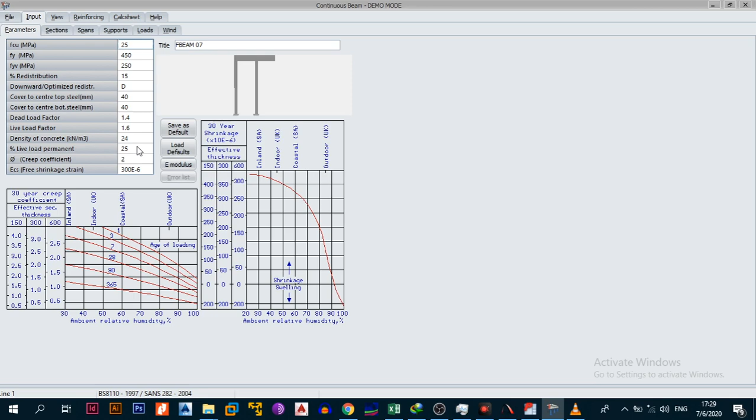So what we're doing today is F beam 7, designed using grade 25 concrete, 450 MPa for the steel, 250 for the links. Percentage redistribution is 15, is downward, is not optimized. The cover to the center of the steel is 40/40. Obviously we're using BS, so it's 1.4 and 1.6, and the density of the concrete is 24, and the live load permanent is 25. Creep factor is 2. Okay, this is just the basics.

So the sections of this beam is going to be a 220 by 500 beam. That's the section. And for the spans, it's going to have two spans, 1.88 and 1.66. For the supports, it's going to have two columns, which are 220 by 220. And then one part is going to be cantilevered, which is the C part, also 220 by 220. You just put it out there.

And in terms of the loads, it's going to have some walls on top of it, so that's why you see there's wall loads, and then there's going to be slab loads. Also please note, this is in demo mode, this is Prokon in demo. So everything I'm using right now is in demo. I'm just trying to show you, you can get the same quality even if you're using demo.

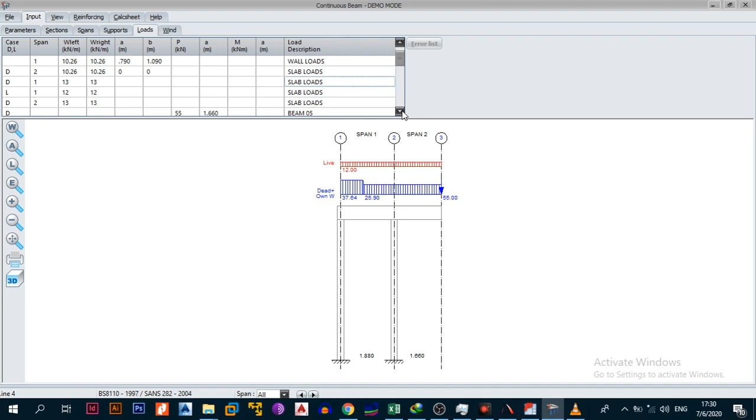So after you enter everything, the next thing you want to do is go to view, and this is where you can see the deflections and also everything else, the moment, the shear, and the steel that you need. As you can see, the elastic deflections, even though it's loaded with another beam at the end, let me show you - if you go to input and loads, scroll down, it has another beam resting on top of it, Beam 5 putting 55 kilonewtons at the end. But if you go to view moments and shear, you'll see, even with that, the deflection is 12.7 max.

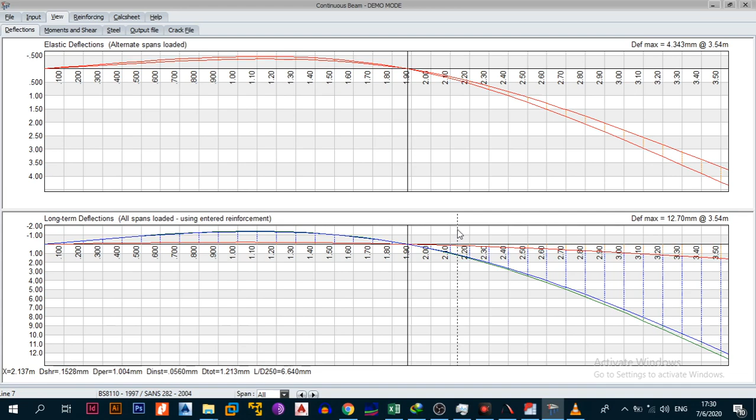Okay, after you load everything with reinforcement, the limit we usually want to play with is 20. 25 is okay. At 35 you start having finishing cracks, so you don't want to do that. 50 is just pushing it beyond anything you want. So if we check the maximum moment and maximum shear, we see that since one part is cantilevered, over the support that is cantilevered is where you're going to be having your maximum moment - in this case, 204.2. And that's where the maximum shear is going to be as well. So you just add this one at this part and this one at the other part.

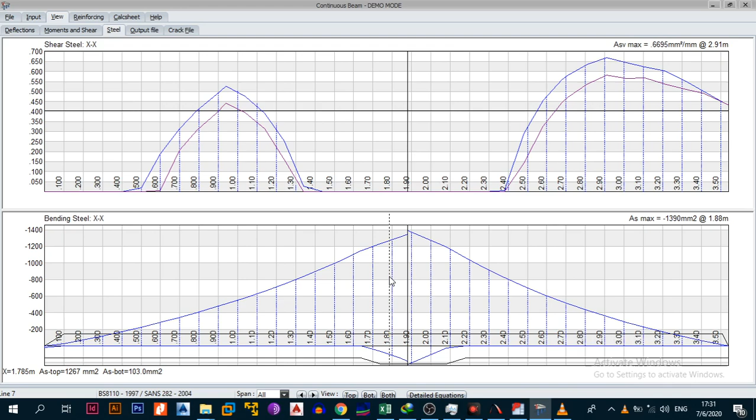So for the steel, this gives you the steel that you require given the shear and the moment that is going to be there. The top one is for your links, then the bottom one is for your longitudinal bars. So we don't worry about the output file or the crack file, we go to reinforcement. In our case, this is what happens - it gives you what type. Is it a normal beam? Is it a slab? Is it 3? Is it 4? Is it 5?

Okay, and in our case we're choosing 1 because it's a normal beam. The maximum bar length, let's just go with 6. The minimum diameter, 12 is okay, 20 is okay, 20 is okay.

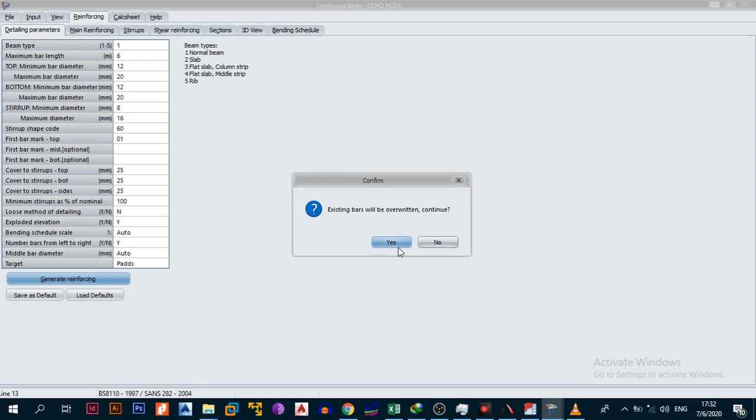I already did this, but I'm just going to show you through so we can actually regenerate. So I'm going to put 60 there, and everything else is okay. So generate reinforcement, existing bars will be overwritten. Yes, continue. Okay, so normally this is what's going to be set up.

This is going to be the setup that you're going to have, right? And in our case, as you can see, it's telling you you need 3 Y20s there, 2 16s over there. But then this is what I like to do. I like to play around with it, just see if I can move the bars a bit, because this is what is going to go.

So this is a normal thing that I usually do once is there, because I'm trying to set up the bending schedule way before I even go and start detailing. Because what we're going to do is we are detailing this beam. I've already designed it, but now I just want to fine-tune the steel and put the bars where I need them.

All right, so in this case I think 5Y20 is just too crowded for me. So what I'm gonna do is, let me try and put some 25s, put them to 2. Right, so that doesn't change too much. So what I'm gonna do again is I'm gonna put this at 32.

All right, so that is too much. And then what I'm gonna do is grab this bar, then delete that bar. All right, so in this case that point is going to be loaded immensely. As you can see, 2Y32s do not even cut it.

So what we're gonna do is we want to add a top bar. In our case, let's just make number of bars 1. So we're just gonna make a 16, and then we're gonna drag it to that point. And let's see, does a 16 change anything? Actually, it does not change anything.

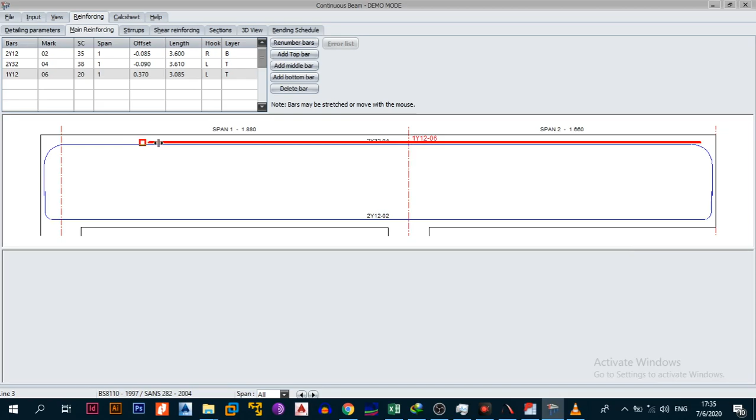Then we obviously have the 1 16, but what we're gonna do is, let me see if we can put a 12. Let's put a 12. So if you put a 12, because a 12 bar is pretty small, so you definitely don't want that. So yeah, those 32s will work. So we're gonna have two 32s and one 12 at the top.

Okay, that looks good, because everything in blue is now under the red. So 32 is definitely killing it, bro. As you can see, it's killing it. You could have put the 32 only. Let's see, that's the other thing.

You can play around, that's the beauty of this, trying to play around with this. Because to be honest, putting 32s all the way to that other side, I'm not really liking that. So I'm deciding, well, this is what we can do.

This is the basic process that you go through. You'll be just looking at, alright, does this work? Does this not work? If it doesn't work, then definitely means we need to do something else, right? It's as easy as that.

So what you can do, right, in this case 32s need a level for about a meter or so. So 16s are not working in that point to that point.

Let's see, we might have to put 16s, because let's take the 32, let's move it back to that point. Let's make it shape code 24 now.

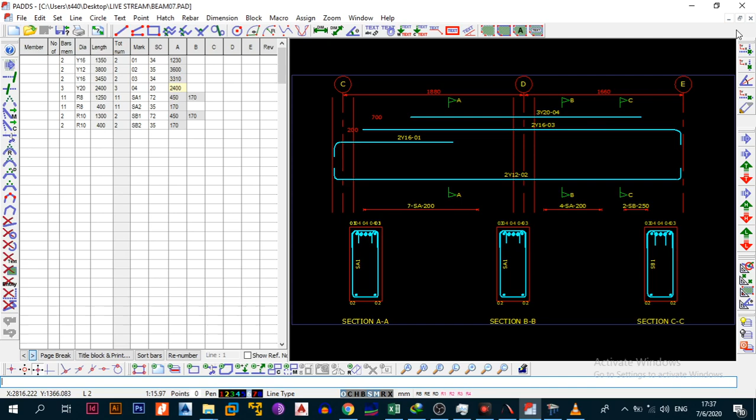Now we've taken care of the top, still what we're gonna do is we need to now look at, let me just close this. Initially I already had the bending schedule generated for me, but I'm just gonna close it, and we're gonna generate it again starting fresh.

Usually what I want to do is I want 2 bars to lap off at the top, so instead of having shape code 38, I have shape code 37. But in this case we cannot use shape code 37 because that would mean we need 4 Y32s in the beam, which is just too much.

We don't have room for pouring the concrete, it's too much. So what we're gonna do is, now we have the top bars, we're taking off, we know we're gonna use 32s and there's no going past 32. So yeah, it is what it is.

Next, what we're gonna do is we need to take care of the bottom bars, and for the bottom it's telling me 12s are okay, because if you check at the bottom we don't even have any moment there that is supporting 12s. So this is what we're gonna do.

In this case we're not gonna use shape code. By default it gives you 35, which is the equivalent of 38, right? It's the same bar, as you can see. Let me just change it so that you see, even if you change to 38 you still have the same bar, as you can see if you check it.

Let me change it again to 35 so you can definitely see I'm not lying to you. There you have 35. So there you go, you have 38, right?

So this is what I actually need to print for the client. What I'm doing right now is what I'm gonna do in real life. This is the thought process that goes when I'm not making a tutorial. I think a lot, whilst in the tutorials you already see what I've already thought about.

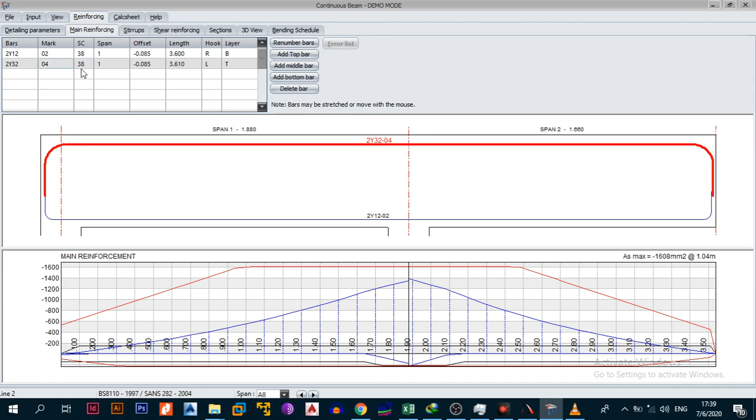So in this case, for the bottom bars, what we're gonna do, I'm thinking of doing shape code 37, right? And let's push this bar. We're gonna use 2 bars, push 2 Y12s over there.

Then we just need to add a bottom bar, right? So the bottom bar we're gonna use 2 Y12s as well. These are going to be laces.

So what this is going to do is that they're going to be over the support point, so they're just going to lace. They're going to lap with these ones, then lap with the other ones as well.

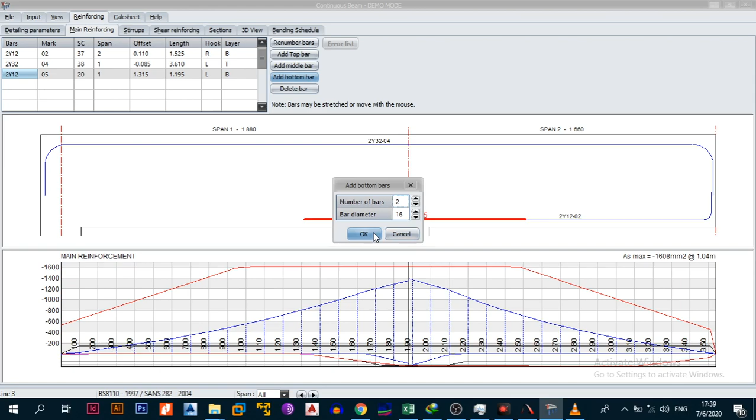So we're also going to add another bottom bar, 2 wide. I'm just thinking of bumping it up, but nah, let's use 12s. We don't want to over design it way too much.

But then the moment there seems to be a little bit too much, because I'm checking it out and now I am clear of that. As you can see, the blue line is clear. So yep, we've taken care of that. So what we're gonna do is, this side is telling me if I put 12s I'm okay, right?

Yeah, if I put 12s I'm okay, because that's the whole gist of it. You just want to put in steel that's, yep, there we go. Serotonin from the sun is still playing in case we need to switch it up or increase the volume. There we go, so that you guys can also hear what I am hearing as well.

So this is it. Now we got 2 Y12s bar mark 6 and 2 Y16s there, 2 Y12s there, and as you can see, this is perfect. Everything in blue is covered by everything in red. This means our beam is not going to fail. All right, so I think this is good for me.

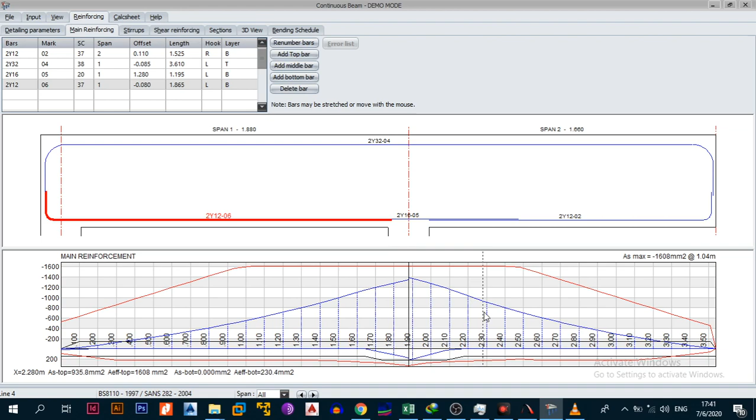So then I go back to detailing parameters. Then I'm going to remove the 1 from first bar mark top and put it at first bar mark bottom. Right, so then I go back to main reinforcement. Then I say renumber bars. So what this does, it starts renaming the bars from the bottom, so that now I know I have bar mark 1, bar mark 2, and bar mark 3.

Then I go back. So bar mark at the top needs to start from 4. So I go back to the top. Then I put 4. All right, and I go back to main reinforcement, then renumber the bars. There we go, it's good.

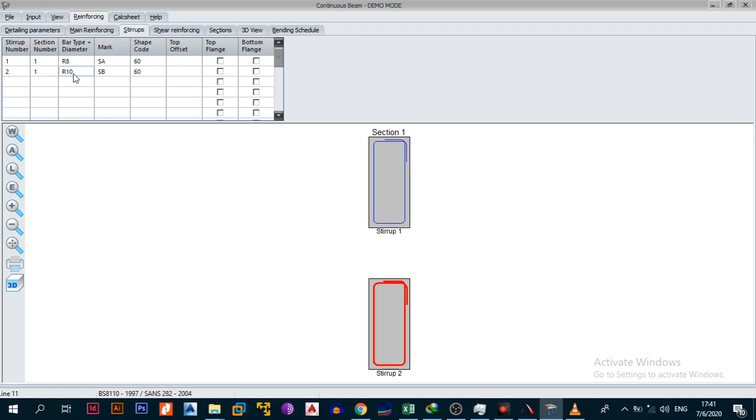Next I need to go to the stirrups. So initially it proposed 2 types of stirrups, R8s and R10s, SA and SB. Let me see why it's saying that. The reason why it wanted to put this in different positions, but now let me show you what I'm going to do. I'm going to go back to stirrups and I'm just going to delete the second line. Then this one I'm just going to make them Y8, right? So I make them Y8 and I go back to shear reinforcement.

So what I'm going to do is I'm going to delete everything else, then start off with the first one. Then I'm going to show where I want my stirrups to begin and where I want them to end. And as you can see, the shear is now taken care of and it's now below. Okay, I just wanted you to have a feel of the track, but now I think it's good.

Let's hear my voice. Oh, we could change. No, let's change. This is the reason. It's a live stream. It doesn't have to conform to certain, what do you call this, certain standards. So we just, hopefully you can. Okay, now that feels good. Right. Okay, cool. Let's go back.

So as I was saying, I was talking about the stirrups. So as you can see, now I have 9 SA, and remember, the stirrup SA is a Y8, shape code 60, and I've put it at 200 spacing. So we're gonna have 9 stirrups for the first span, and as you can see, that takes care of all the shear that we had initially, and we're good to go with that.

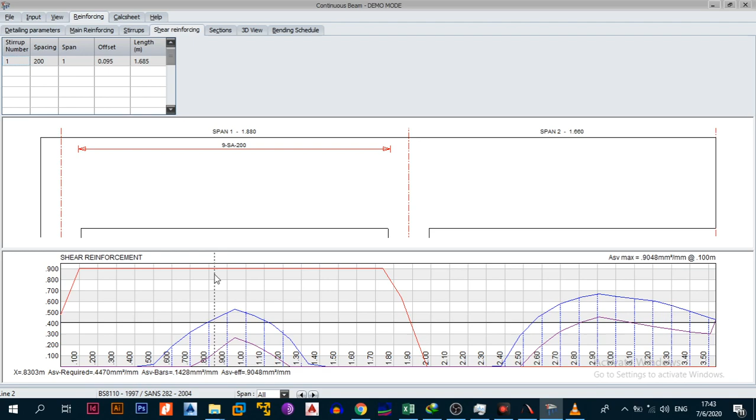And also, no, wait, we're gonna have to put 200 again. This time we want to go to span 2, and for the offset I'm just gonna say 1. So you see what happens. This is what it does. For the length I'm just gonna put 1. Now you can see the arrow pops up, and you can move this all the way to where you have the other beam coming in, because this is where it will definitely need to take care of that shear that's coming in.

So just to make sure that you also provide what we call hanger stirrups, I'm just gonna push 4 at 200 there, then I'm gonna add this one, then I'm gonna put it at 150. It's gonna be on span 2, then the offset is gonna be 0.5, then the length is going to be 0.25. This is just so that I can see the arrow. So this is what we're gonna do.

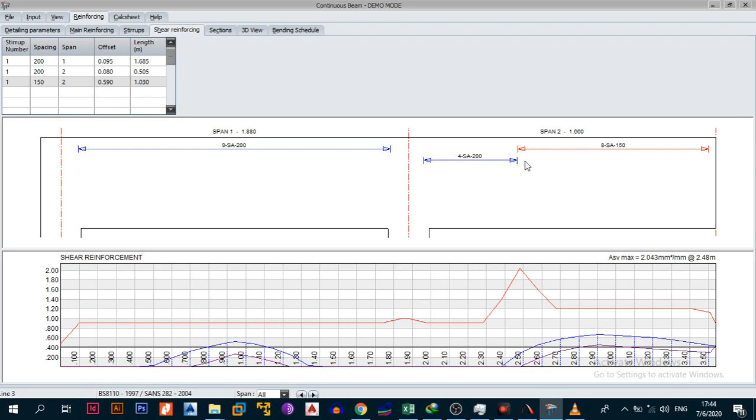So these are going to be extra stirrups that I'm putting there to adequately take care of the load that is going to come in from the extra beam, that is beam 5. So now we've done this. The next thing that you want to do is go to my sections.

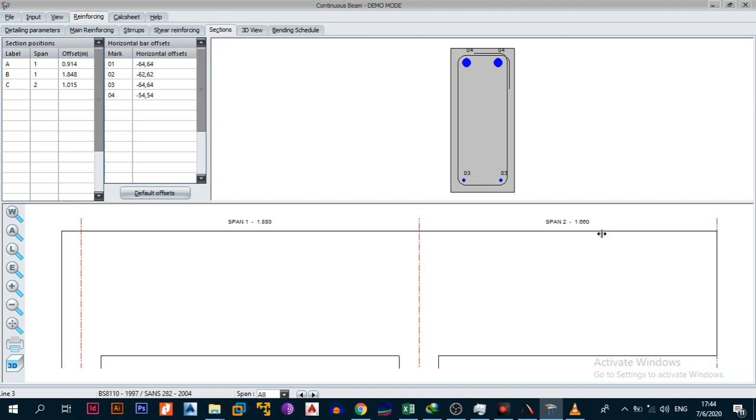How many sections do I want to show? In this case, I think I'll show section A. Section A is good. Then we want a section through the support, because you've got to know what's happening through the support. Then we're also going to have section C, which is going to be the last section. Okay, all right, so it's still playing, and now we're good. So these are the sections, so just wait up.

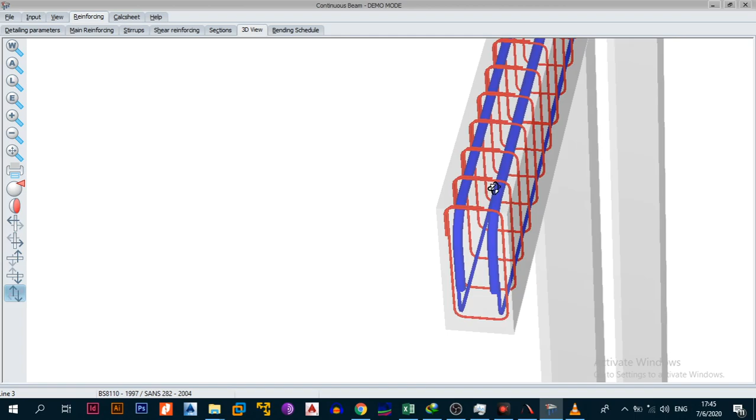Then this is going to be in 3D view. So this is going to be my beam when it comes out on site. As you can see, 32s are huge bars, man. Just look at these bars. These bars are huge. Then you're going to have the 12s at the bottom, these tiny little 12s. Then you're going to have the 16s at the center. And yeah, this is it.

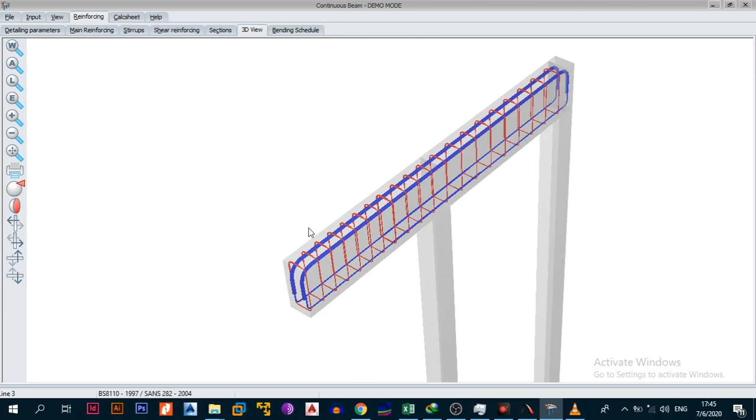So there is the beam, there it goes. So I already designed these beams way back. I'm now just trying to detail them because now they're needed. So last but not least, what you do is you go to the bending schedule, and in this case, I remember it's starting from grid 5, 6. So it's 6. All right, I'll look at it later on, but I'm just going to put 6.

So this might take too much time and it may crash, but normally after I've done this, the next thing that I do is just say generate schedule, and I wait for it. And remember, this is in demo mode, so we're going to wait for it to produce the bending schedule. So as you can see there, it has produced the bending schedule.

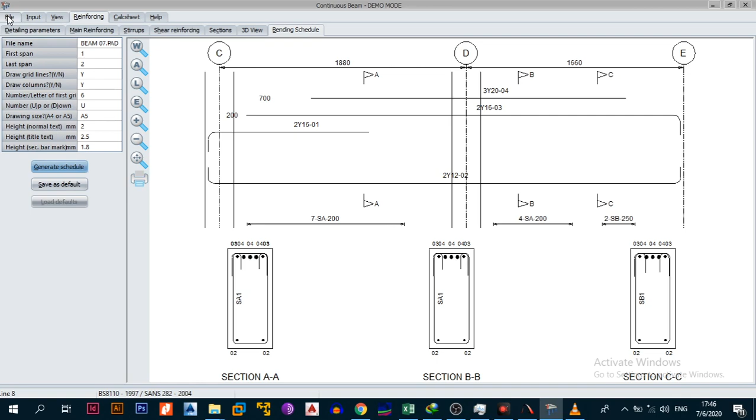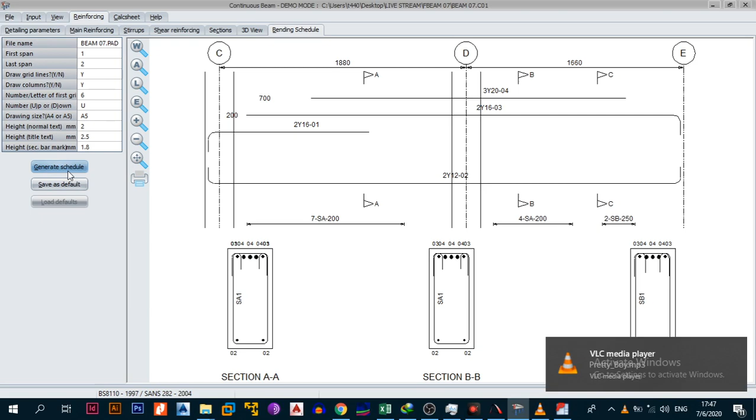So let me just go to file to see if I was in my working folder. My working folder is wrong, so I need to go to computer, then go to desktop, because I have a folder there, and set this as my working folder. Yes, save, and save it as what you want. So I'm going to go with beam7, and it's going to say it already exists. Yes, replace. Then after I'm done, we just want to regenerate that schedule.

Okay, now it's being used by another process. So what this means is I need to set a different folder. Alright, this is the boring part. No, there we go. The schedule has been generated. Now if we go to my desktop, go to live stream. Which one is the working folder again? Let's see. There, as you can see, this is Prokon 3.0.

It's trying to load the PADDS window, so we just have to wait for it. We're just going to be patient because the live stream is not a tutorial. But yeah, that is basically just the workflow that I usually go through when I'm designing beams, right? So let's see, it's 1747, so this is definitely it. So let's wait for it to start up.

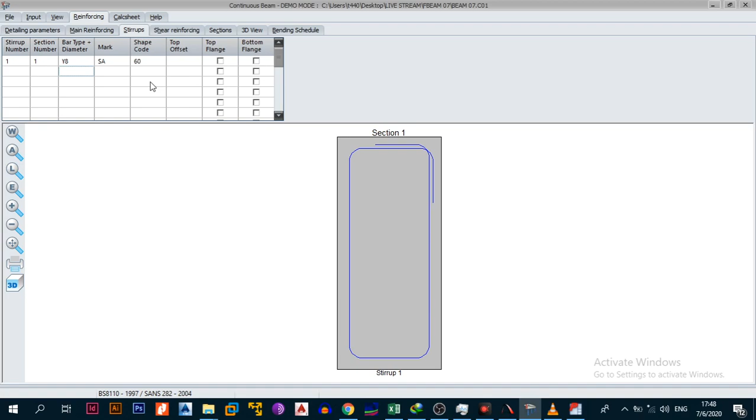There you go. So this is what happens. We were in Beam, right? We went to the detailing parameters and we set them. Then after setting the detailing parameters, we went to the main reinforcement and chose how we wanted our bars to be set up. Then next we went to the stirrups or the links and we chose Y8, bar mark, shape code 60. And then we went to the shear reinforcement.

This is where we're just showing where we want our stirrups to be at different spacings. Then we looked at the sections, where we want our sections. Then we looked at the 3D view. This just helps you visualize, but it's not important. And then we looked at the bending schedule.

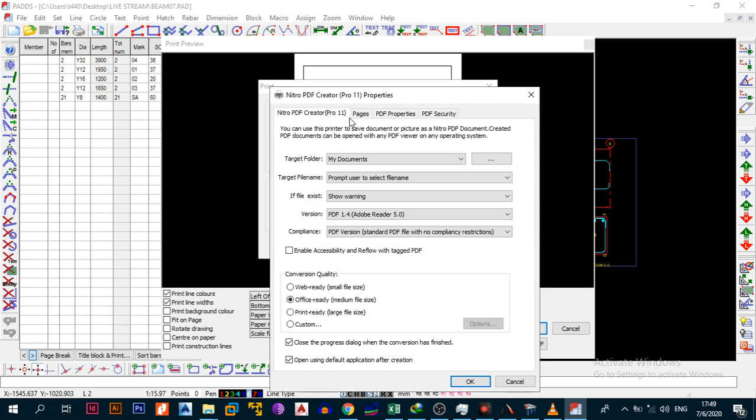So all of this I was doing so that we could have this bending schedule. But the problem is this bending schedule is not professional, man. Just look at it. To give you a glimpse, I'm just gonna go title block print, and let's just make sure the BS template, yep, it's definitely. So I'm gonna print a sketch. So I'm gonna say print properties, pages, later. Then I go to A4.

Then I say, okay, so I need to keep this video short as well, because where did it go? This software, I think it records. You see? No, that's not my. Let me see. Well, it's not taking up too much space, so I don't think it's using too much space.

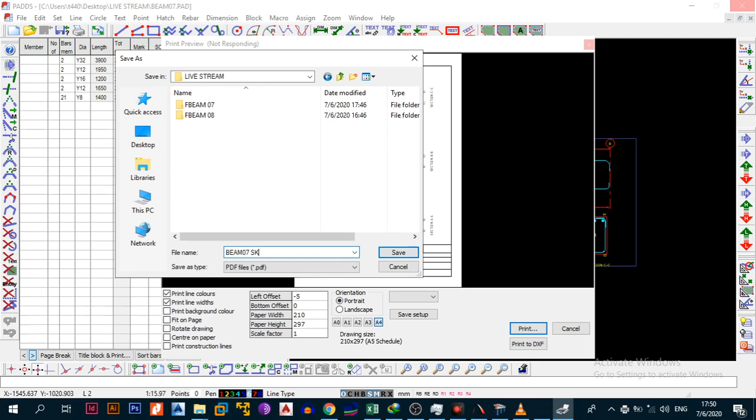So we're gonna go to desktop, go to live stream, then we're just gonna say beam 7 sketch. That's what I do. And I'm also in a compromising position on my desk because I have a different setup. So let's wait for it to pop up. As you can see, I do a lot of detailing and everything. So wow. Right, there you go. Then what I want you to do is say view and rotate. So as you can see, this is not professional, except for the title block. This doesn't look good.

So now this is where the part comes in. You've designed it, then you detailed it because you told which bars you wanted, and you also have an idea where you need them. But the beauty of using Prokon is that the bulk of putting the bars and the line work and everything else has been done for us. Now what we only need to do is to be the last man, do the final touches, do the nice little nitty-gritties.

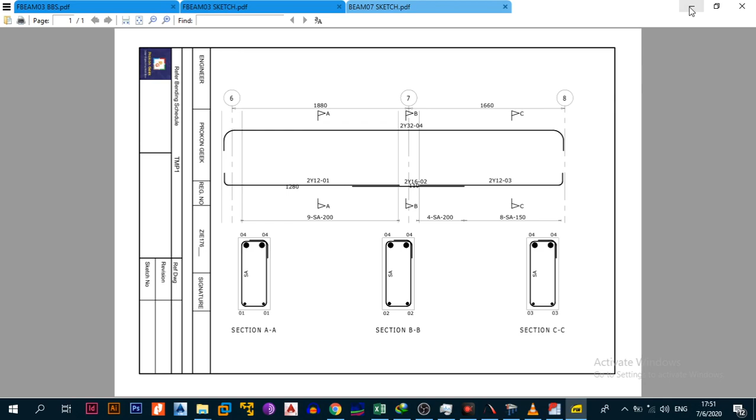Let's just make sure this one is recording. Yes, it is definitely recorded. It's been 23 minutes in and streaming. So let's go. Let's take care of that.

So the first thing that you do is you go to status bar. Then you want to change this to elevations. Right, the music is still going. I like this track. Sections. Then just say okay for now. Then what you want to do is BB, select everything.

Remember, I'm doing this in demo, man. This is in demo, so you don't have an excuse for learning Prokon, saying I don't know how to use it in demo.

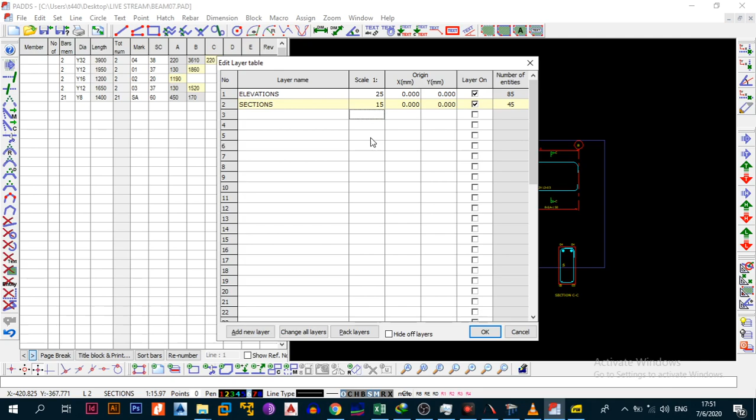Okay, and we're gonna say okay. I say no for now. Then I just want you to move this, move it down a bit. Right, then I think that's okay.

Now we gotta move because supper is cooking right now, and very soon people will be calling me, yo, where you at, Prokon Geek? You need to come and eat, so I can't defy those orders, because I'm not the one who's cooking. So if somebody's cooking for you, you have to go.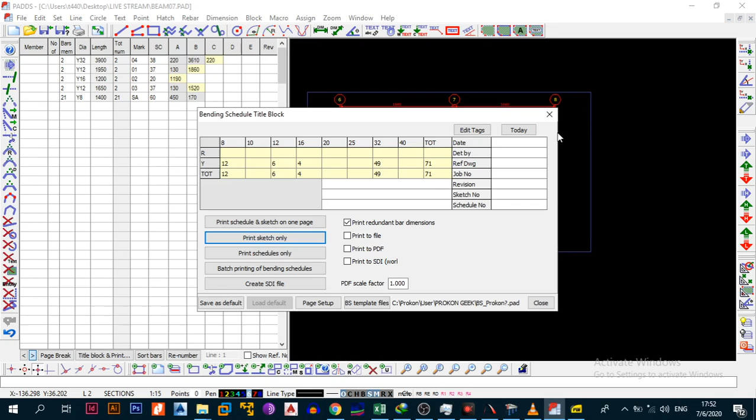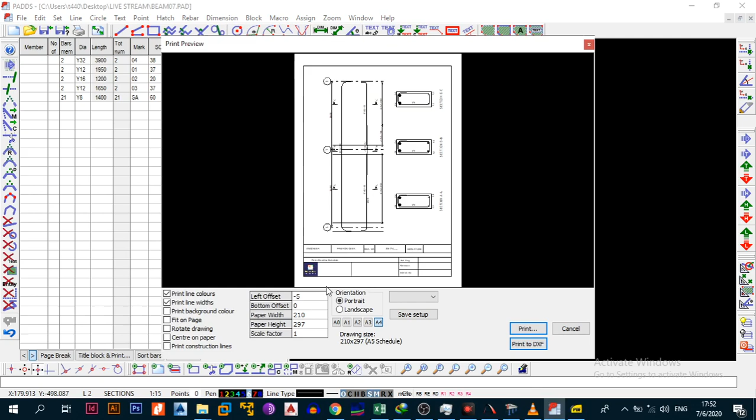So we're just gonna say title block sketch only. We will do this whole numbering later. So print sketch only. Just want to see how it looks. All right, so I think I need to move it up a bit. So yeah, you have to be like an artist when you're doing this, because I always like to see how it will look before. I saved it with the wrong name. Let's just go back, print sketch only, print, okay, then beam 7 sketch, then say overwrite. All right, now it's looking good. Now let's do the nitty gritty.

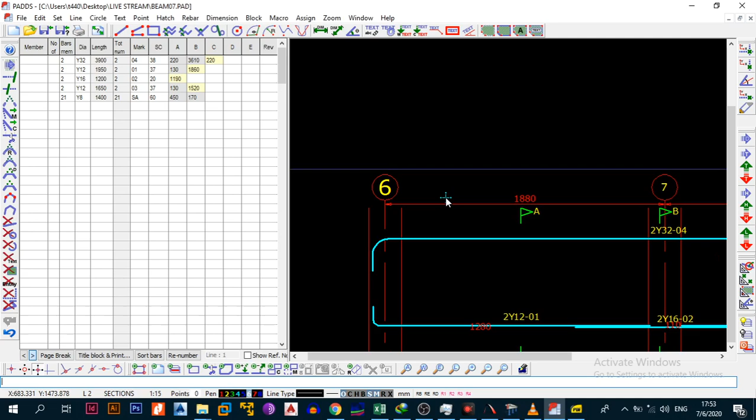So the first thing that you want to do once you've set your scales, I set them to 25%, is change this text. So make sure you change this one from 2.5 to 5. All right, that's great. So you want to say text get that one, then text set. This is 2.5, 2.5. Okay, that's cool. So the next thing you want to EI, change this text to 2.5 as well.

I'm gonna compromise the setup. I think my shoulder is gonna hurt after this. Definitely need to watch a movie after this, because yo man, I can't. Then EI. So I found this cool movie called Train to Busan.

It's a zombie apocalypse movie.

So all you need to do is change the text ID. I think we're good. Then you text get.

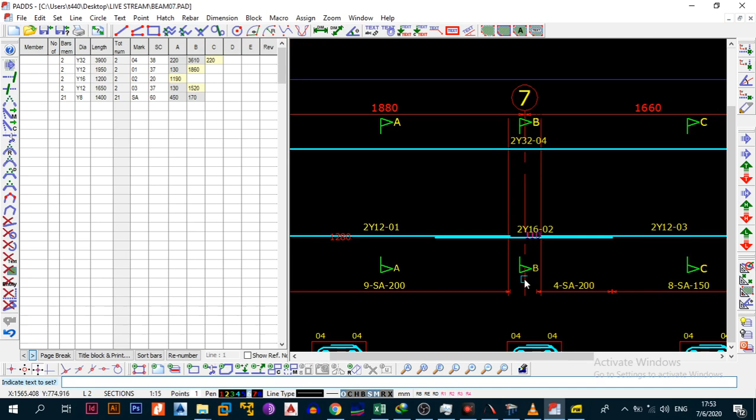So people were saying it was like super cool, like the super coolest zombies. So I'm just gonna test it out and see if it's true.

Now we gotta change this one. For the bars, you change it to 2.3, right? So text get, text set. Okay, right, I'm enjoying this. Then text get, then text set.

Okay, we need to change the track. Chill music, man. Sis, which one is this one? No, man. Today's plan. No. I know. What am I busy changing music? Alright, now I think this one is okay.

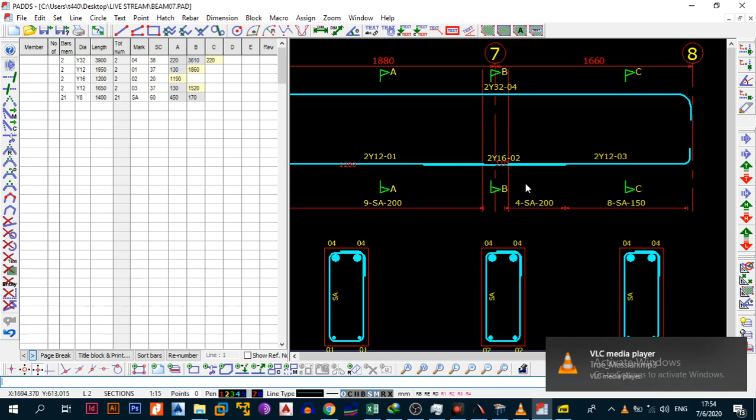Sorry about the detail, but this is a live stream video. It's different from the rest, right? It's not a tutorial.

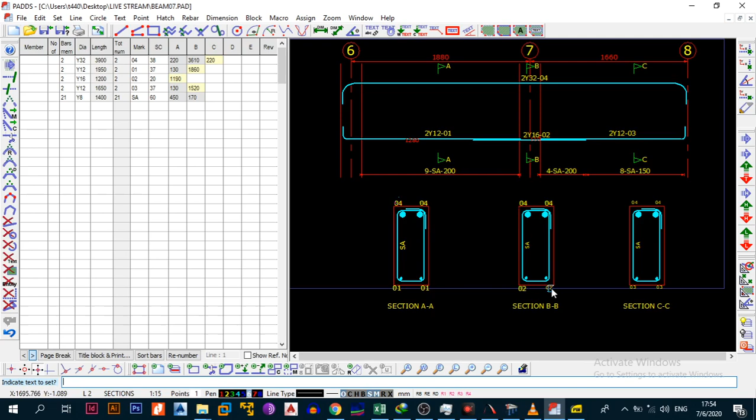This is 2.5, that's okay. So you're gonna text get this one as well, then text set this one. So you see, this is the beauty of using Prokon. I don't have to draw these sections. I just have to be me. This is already done for me. So then the next thing we're just gonna do is remove that, okay?

And next thing that you want to do is EI, and set this text from pen 6, because this is going to show the edge of the concrete. Then change the style to C, go to C, hidden. Then line get that line, then line set, line get, line set. Then this is going to be the cantilever part, so you just want to LP this by 2, no, it's actually 110 both, so it's going to be 110.

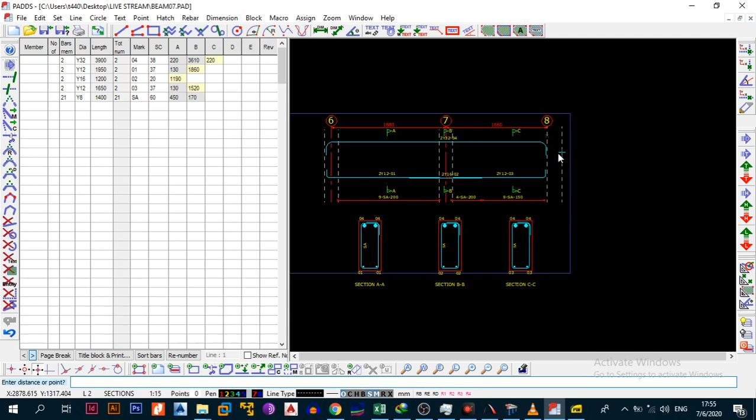That's one thing that I'd almost missed. It's supposed to be one. What the hell is happening? So we're just gonna LP, yep, by 110. Oh, I'm on a different layer. I'm supposed to be doing it on the elevations. That is the problem. So it's 110 this side. So you're gonna LP this line by 110. All right, as you can see now, it is showing up 110.

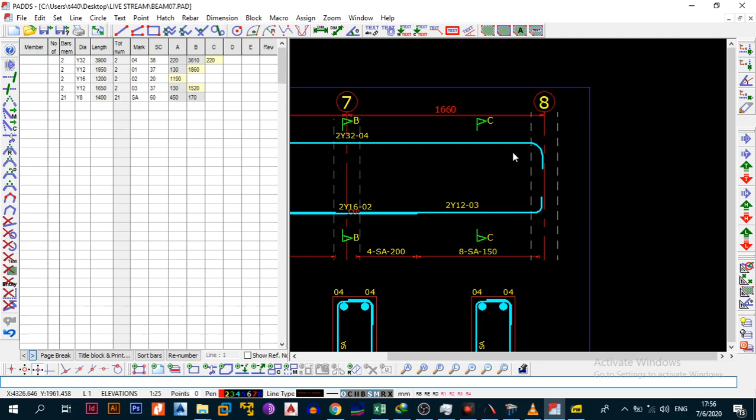Then you line get, show that this is the center line. Then you line set this. So we're definitely going to need to move these bars to the other side. And that's the tricky thing about using shape code 38. You can't afford to mess up on the length, because if you mess up on the length, a 32 bar

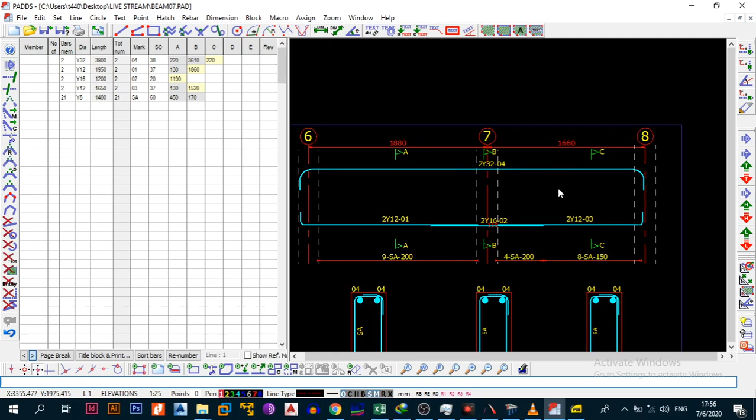cannot be unbent on site, and you don't want to start cutting off this bar, because there's really no way you're gonna be able to do anything about it. So you don't want to mess up when it comes to this bar, right? Obviously you want to make a provision for maybe shorter cover on the ends, so that at least it fits, because the most important part is the center part.

All right, so once that is done, the next thing that I want to do is line get, then get the red line, set these section lines to red instead of green. Green is too thick, so we just want to do that.

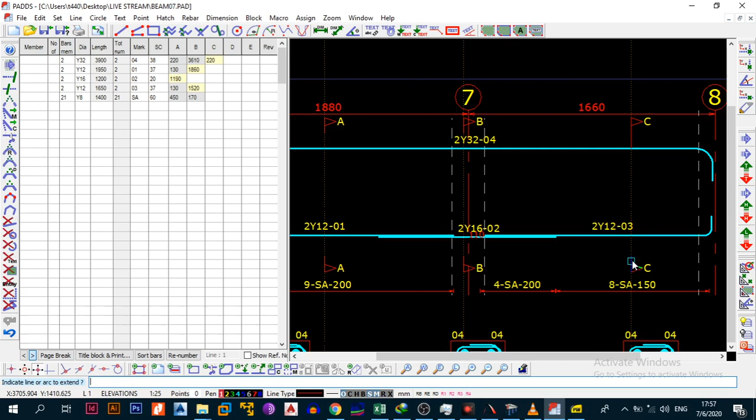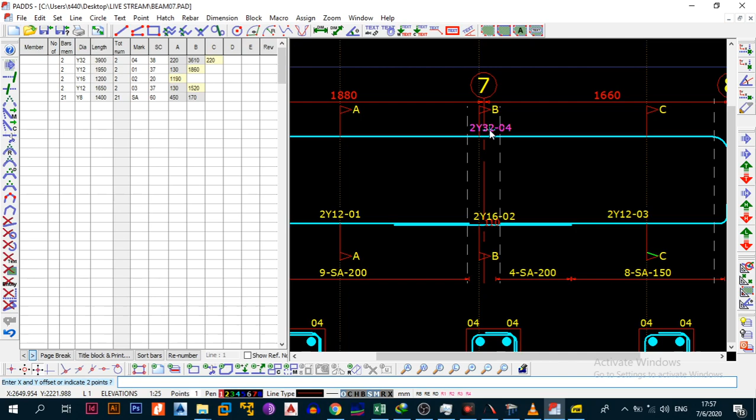So that, you know, remember, when everyone is telling you they're detailing in 10 minutes, they're lying to you, man. They're lying to you. I'm one of the fastest guys on the planet, trust me. Okay, I know I'm not the fastest guy on the planet, but hey, I'm like lightning speed, Lightning McQueen. You remember that cartoon? I think I was still in primary school when it came out, but I think late primary school. But you know, I'm a nerd, so anything that fascinates me can still fascinate me.

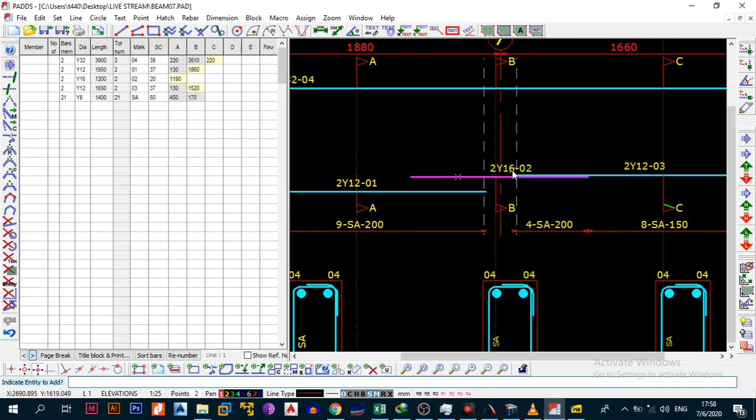So what we're gonna do, this is gonna be a lower bar, so we're gonna drag it to this point, and we're gonna remove this little red text, remove that. So if I seem a little bit slow, it's because I have to look past my microphone to do this, which I don't normally do. So we're just gonna EI and then change this to B.

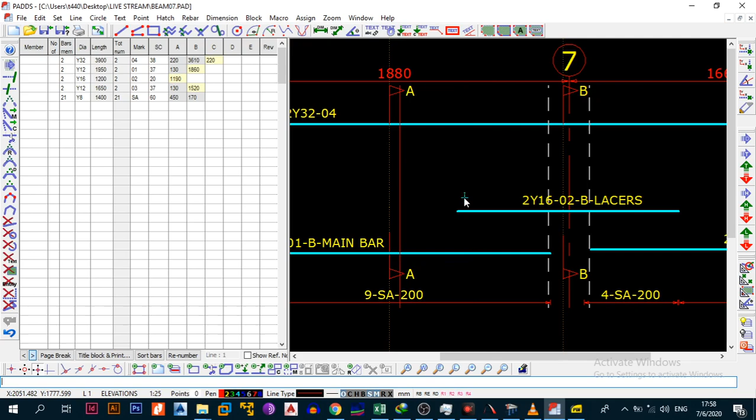So we're just gonna LP already. I'm just gonna show you. Just LP this by 800. All right. Wow, is that 800? I didn't know. So this is by 800 as well. And LX, so there you go.

And RX to extend the bar to this point. All right, bar mark 2, as you can see, has automatically changed, and it's also changing on the bending schedule. This is the beauty of using software.

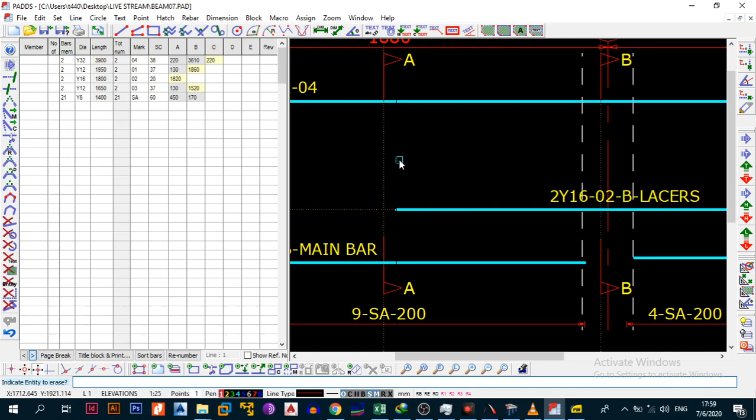I know some guys use AutoCAD. I spoke to this one beautiful lady. She's still not married yet, so she's a civil engineer as well, and she was saying she uses AutoCAD, and I was like, whoa, you are the main engineers. Me, I'm lazy. I use software, main boss.

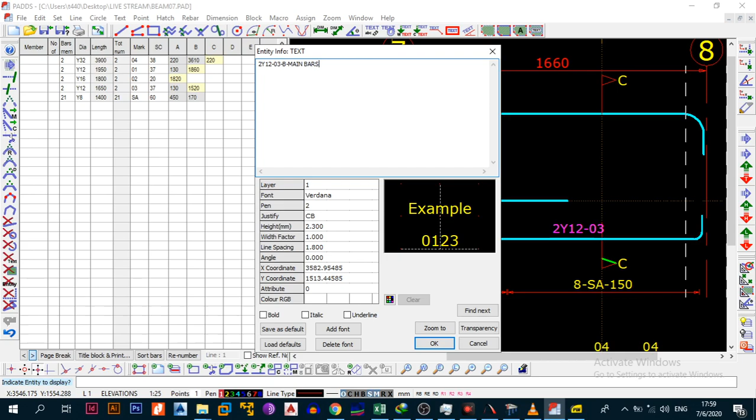All right, so that is good. Now you also just want to indicate for the people on site what this distance is going to be. All right, I snapped to the wrong point, so LY, then DH. There you go. You're showing them that it's going to be 800, and then you can B4 this, bring it to that point, and LX at this point, then LY at this point, then DH, right? That point. Now we're good to go. So it's showing it's going to be 800.

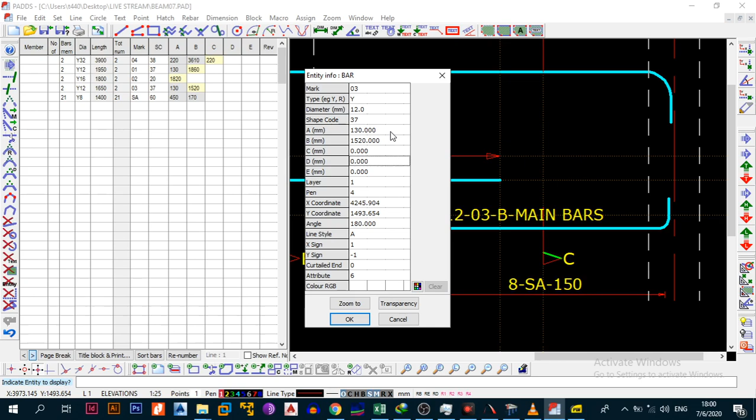So these are main bars. Then also you need to change. So this is a Y12 bar. So by default it needs to anchor by 144. 12 by 12, that's 144. So it definitely needs to. So these are the nitty-gritties I was telling you that Prokon doesn't do for you. And that's why you then come in and you start doing them on your own.

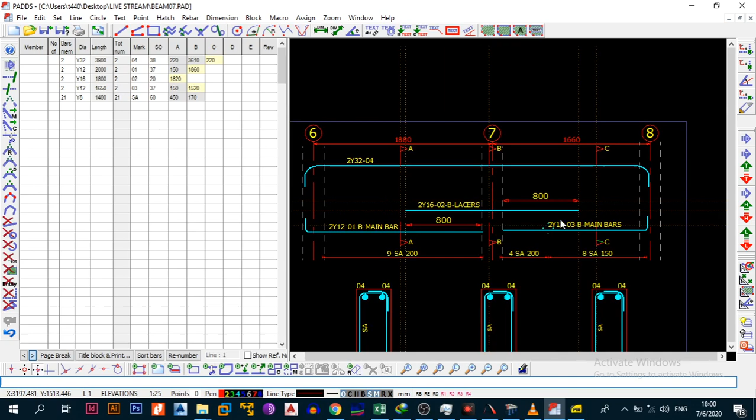Next thing, yeah, the beam looks okay, looks cool. So I think we've taken care of the bottom bars. Your main bars, like the bottom bars, they will end at your support. So the moment you just RX, your bar automatically shifts and changes for you there. Now with the top bar, you need to know that the anchoring legs will definitely need to be 50 by 32. So 50 by 32, if you say 50 by 30, that gives you 1500.

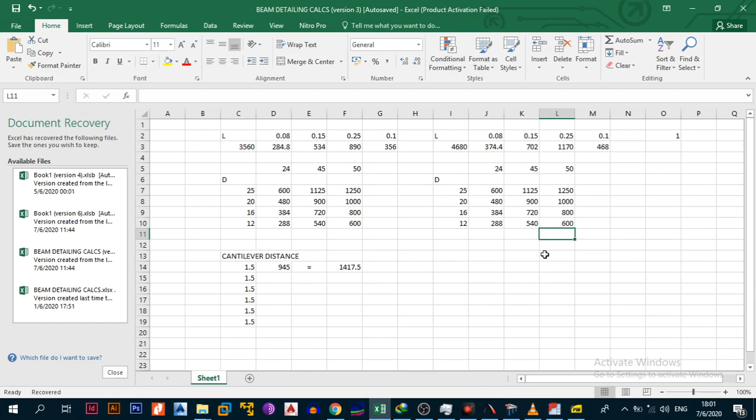So 2 by 50, that gives you, all right, that's 2000, bro. I'm sure, right? Where's the calculator? Let me just put 32 there. It's 1600. Oh my gosh, I lied. How did I get 2000? 1600. Okay, it's time for you to change, man. I know. Open with VLC. Okay, I don't know. All right.

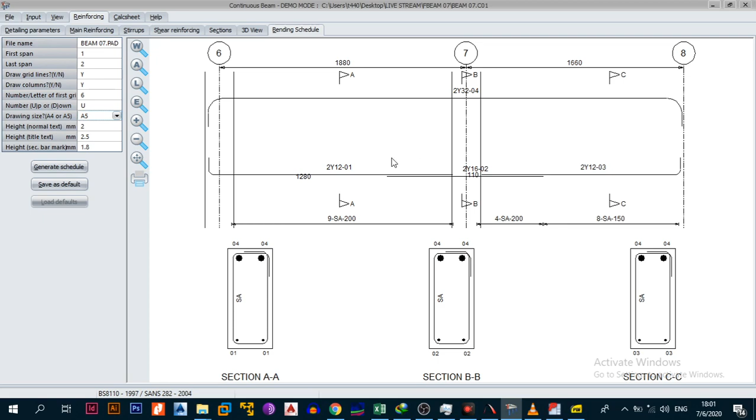So yeah, this is what's going to happen. It needs to sink all the way down. But since we don't have that huge, okay, so this is something that you can just make off as the engineer, right? If you check the shear at the ends of the beam, or the moments at the end of the beam, it's not too large, so you don't really need a huge development. So you can always cut that in half. So I'm gonna cut it in half, or you can even cut it in like a fourth, because it's virtually almost zero, right?

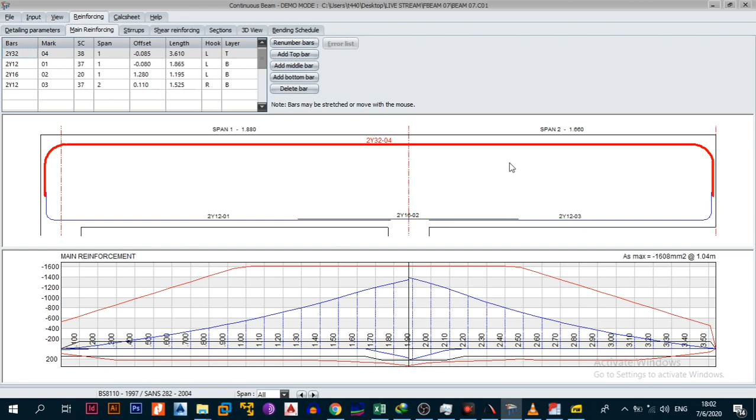But in the case where you have your bar at the end there, but your shear, the blue line, will still be above your red line, what that just means is you need to put the development length. In this case of a 32, you would need to put 1600. But in this case where we don't have that, these are some of the things you just need to be looking at yourself. The reason why I'm saying that is because I know at this end there's not going to be a column, right? It's just going to be this guy carrying that guy.

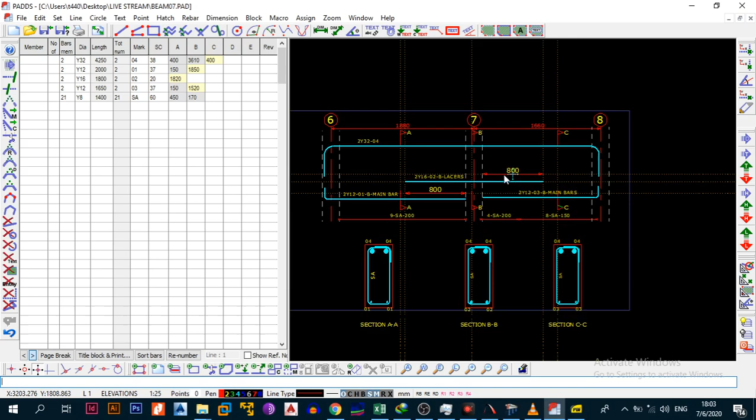So this is a 500 deep beam, so I'm just gonna put him a 400. So it's gonna be a 400. You can put the other one, yes, but then I just realized we don't really have that much shear at the end. So yeah, you can do that. That's just one of the things. So that is why you always need to check it in the end, even if you use software. So this is gonna be a top bar, and this is gonna be a main bar. And now, this cover here is going to be okay.

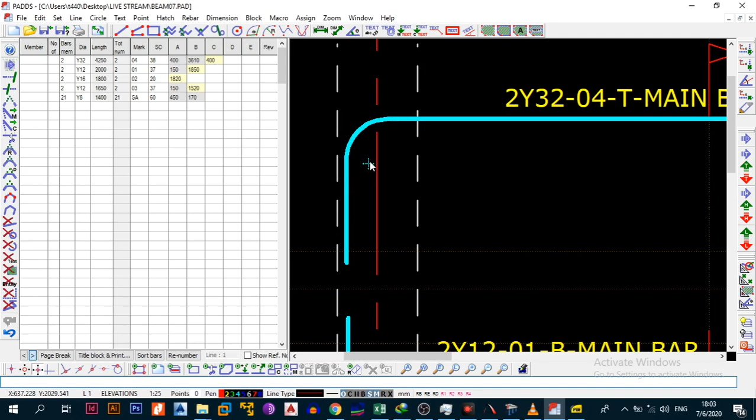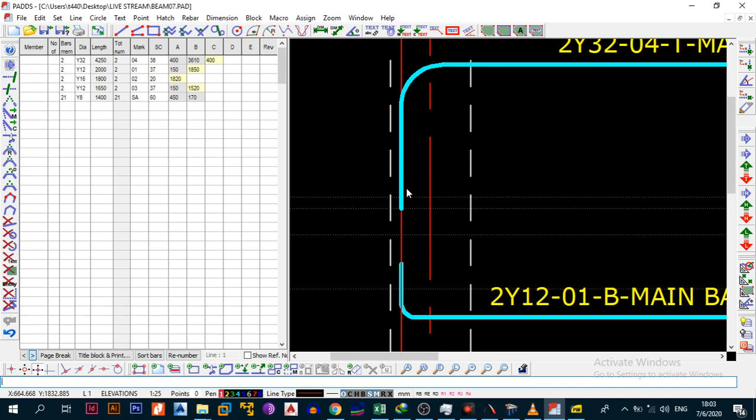Trust me, on paper 10 looks like a lot, but when it comes to the actual framework, you could have problems. All right, so in this case, we're just gonna LP this.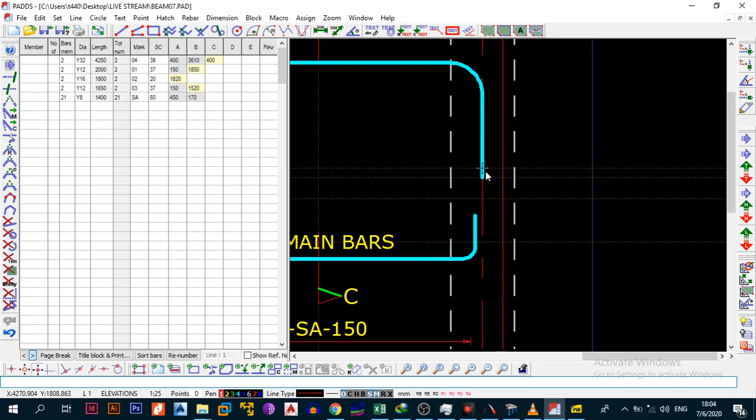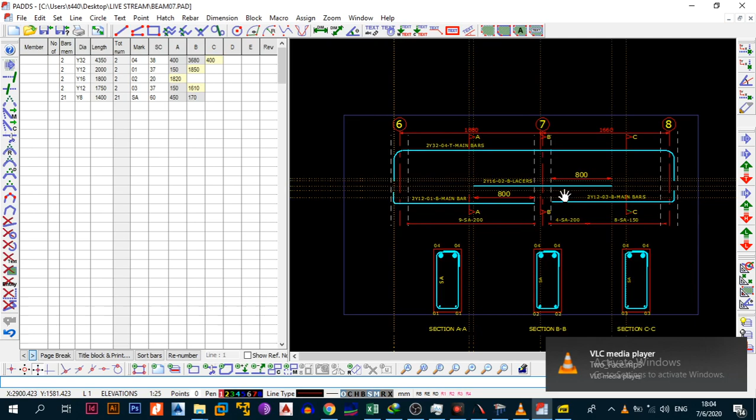Now we know this is gonna be by 40. And what we're gonna do is we now just need to RX by 40, and the bars are now good to go. That's the critical thing, that's why I also don't like using shapecode 38. It's tricky, it can be a very tricky thing, and I don't like tricky bars.

So at least now, if it's like this, it'll be good to go. Then the next thing you want to do is you just want to B3, then copy this to this point, don't worry about where it is. Then you're gonna copy it again, just put it. So the first one, you're gonna change it to

exploded view, and it's gonna be not to scale. So this is how I detail.

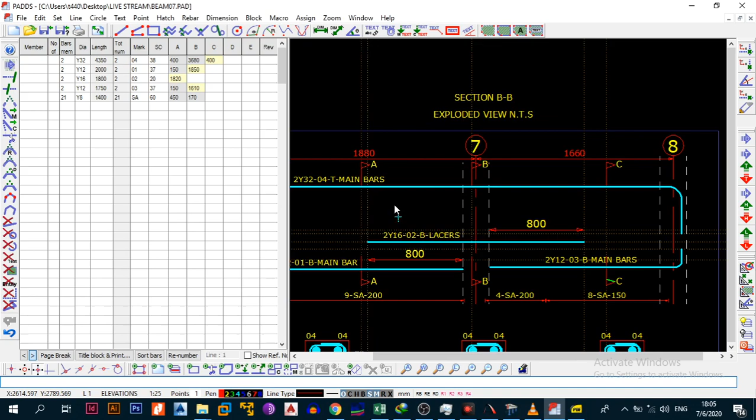Listen to the music, that's the truth.

Then you're gonna call this F beam 07, right? And this one is going to be a 220 by 500 deep. 500 deep, it's 500 deep, man.

RC downstand. And yo, I make voices because I'm also a voiceover actor, or I pretend I am. But I wanted to do theater, and that's the truth. I ended up here, but yeah.

Change this, I'm detracking. This is gonna be 5. Change this to pen 4. All right, now that looks good. Then, no, we're gonna move the blue one. All right, so that looks good.

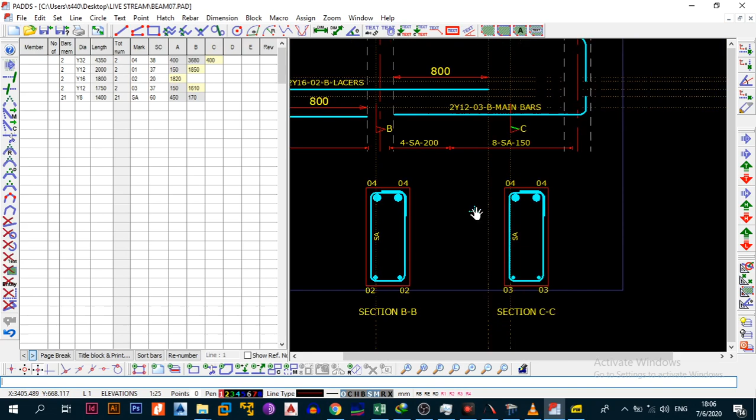Now the sections, you don't even need to play around it, because look at this. Section A, you have bar mark 1 and bar mark 4. Section B, you have bar mark 4 and bar mark 2. Then section, you have bar mark 4 and bar mark 3. All right, we need to change this. Line get, then line set. All right, change the green line.

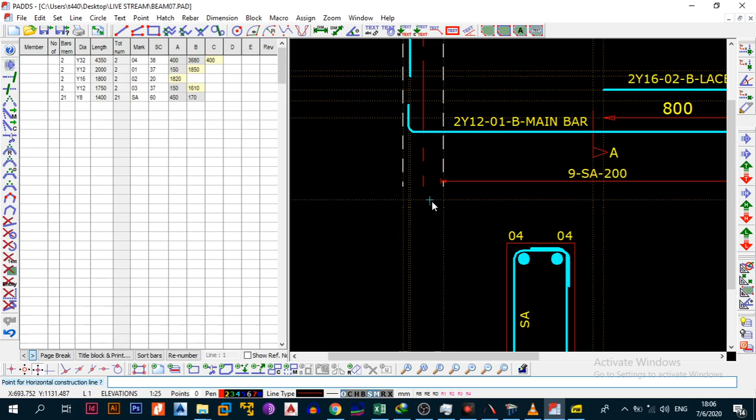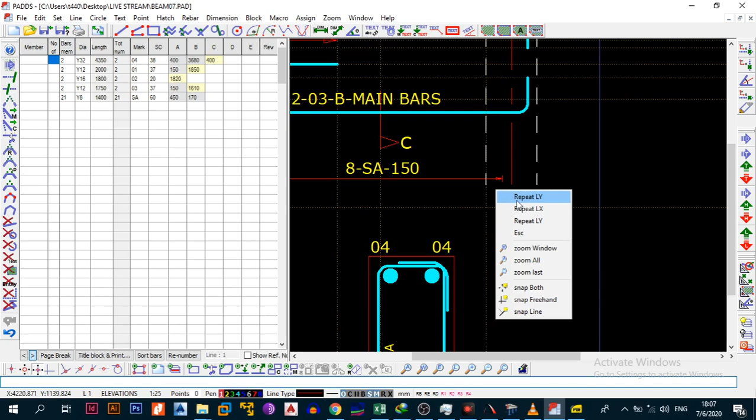Why? Let me just put back my favorite track, but this one is kind of fire. I know some people are asking me, what age are you? And I'm telling you, I am pretty old, but the problem is I am young at heart. Probably the reason why I'm still not married as well. Although I don't plan on

doing that. Alright, so 220. I'm gonna be the... I want to be that rich uncle, you know, who doesn't get married but spoils his nephews.

Right, so 220. Then just text get because the 220s look too large. So text get, text set. All right, takes git, takes sit. 220, all right, that's good. And we have set that. We are good to go, I don't see anything problem.

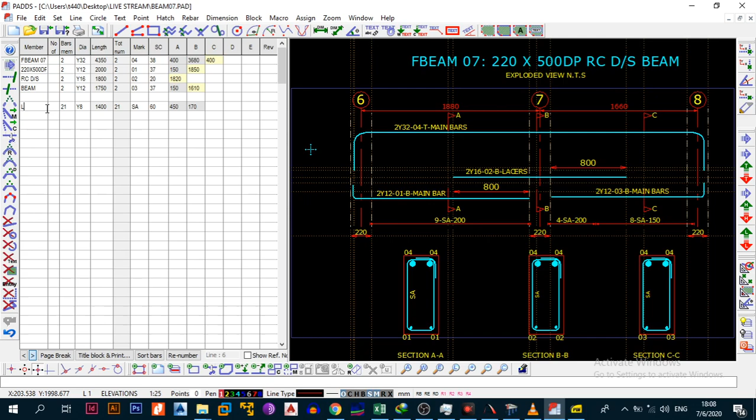Then you just want to come there and say fbeam 07, and you just want to tell these people, trust me, you just want to be explicit. It's going to be, and also you want to be explicit, it's a downstand beam. So yep, that's good. Then also this, you can control I so that you sort of differentiate where these ones are, and you just want to say these are the links. All right, and I think we're good.

Next thing that we want, dude, we're good. We have detailed it. Now all I need to do is just print it. So I'm just gonna say today it was detailed by PG reference drawing. All right, I can show you all of this, but I'm just gonna say this is fbeam 07 rebar, all right, that looks good.

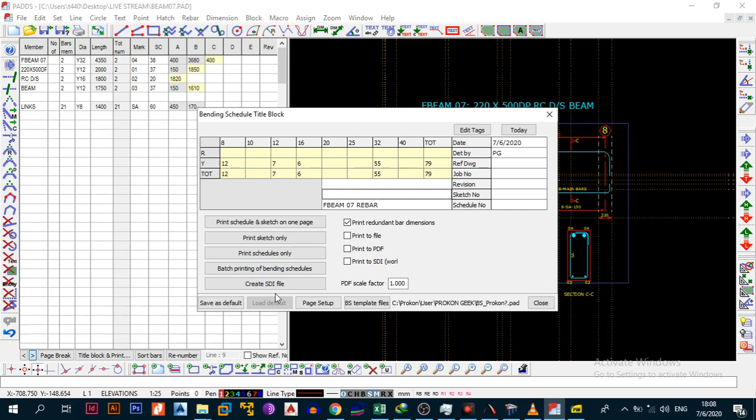Then all you want to do is print the sketch. Wow, did I just say sketch? Right, print and print, then overwrite.

Now I want you to look at this. Look at that beam. All right, now as you can see, you have clearly labeled to this.

Remember, there are two types of detailing. You can detail to scale, or you can detail an exploded view. I'm detailing using exploded views, so we're good to go.

Beam 07, 220 by 500 deep RC downstand beam, exploded view, not to scale, from grid 6 to grid 8. You're going to have two Y32s bar mark 4T, that means top layer main bars.

It's going to be shaped with 38 as you can see. Then at the bottom you're gonna have two Y12s bar mark 1, bottom main bar.

It's gonna go all the way. It's going to anchor into the column at grid 6, but it's not going to anchor at the column at grid 7. And then it's just gonna go all the way to the cantilever at 8.

Same applies, it's gonna have a 220 beam connecting into it, so it's going to be correct. And now as you can see, we're good to go.

9 SA, 4 SA, 8 SA. So this is just showing them from this point. So I need to, yeah, that's the point.

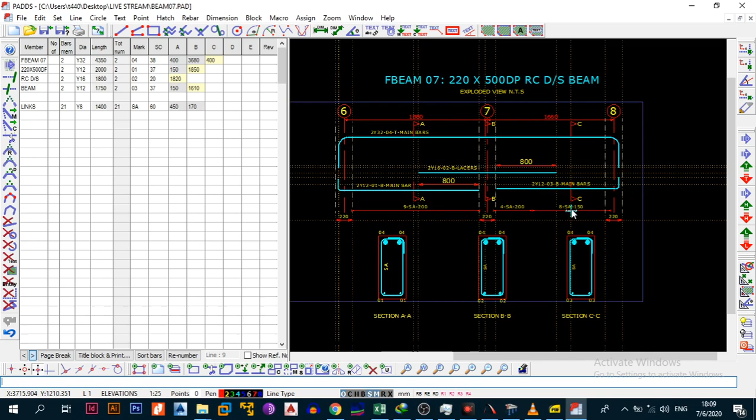This is what you need to do. You also need to show these guys what is going to be the length between. So the best way is just to detail this length, and then the rest they can work out themselves. Man, how dumb do you have to be not to be able to work that out?

This is 475, so this is going to be, all right, let me just, this is going to be 1660 minus 475. Come on, how dumb do you have to be? Hold on, I put all the other dimensions for you.

All right, then after that it's going to be 8 SA at 150.

Hopefully the steel fixer doesn't see the video, but why would he see the video?

So we're just gonna say print beam overwrite, 220 by 500 deep RC downstand beam, exploded view, not to scale, 2 Y12s bar mark 3.

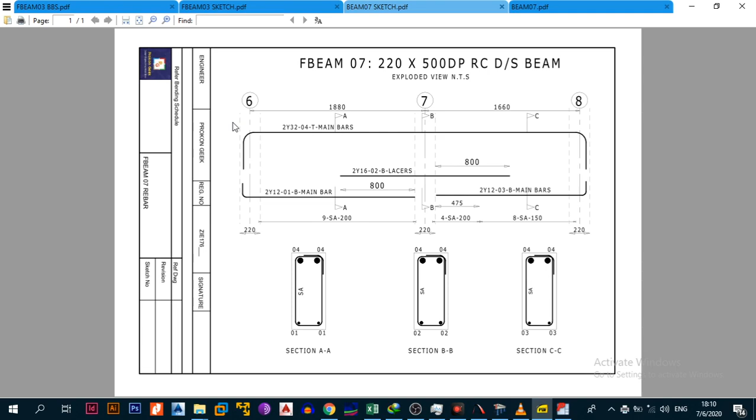So as you can see, all the bars are there. If you want, we can rotate it.

This is the cool thing, because people on site usually, you know, they're stingy. They don't want to print A1s, A0s. So this is like an A4. And if you want to zoom to actual size, this is what it looks like at actual size.

Okay, all right, excuse me, 2 minutes, I'm coming. So right, so yep. Now I need to go in it.

So this is it, this is for the live stream. Now let me just print the bending schedules only.

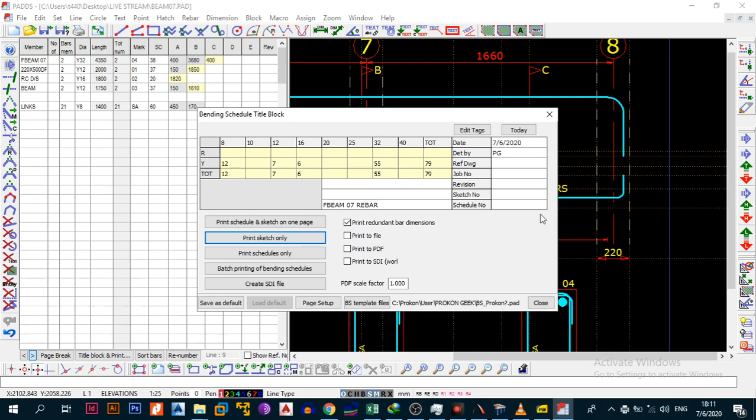To print the bending schedules only is okay, just print the schedules only. Then you say print, and in this case I just love to add BBS at the end.

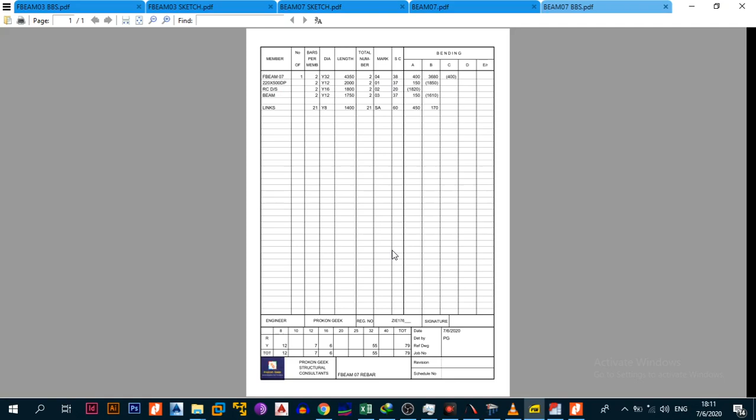Now I definitely need to cut it off. As you can see, sorry, I had to scream at the end, you know, someone has come. So this is my first time streaming as well.

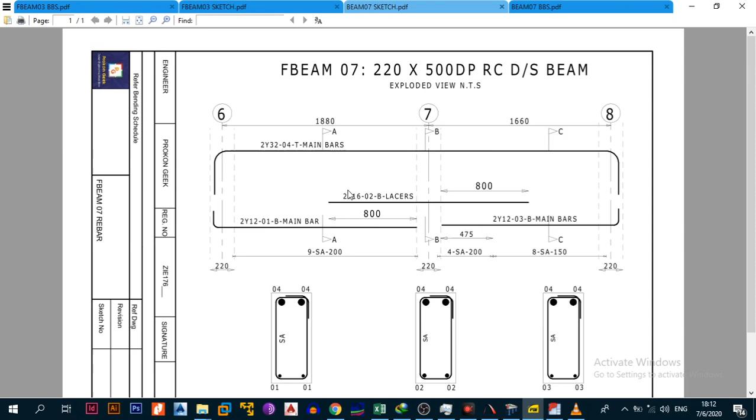They see this. If you want to add some notes, you can always play around with it. Nothing is to be done from to scale, they just have to use the dimensions that you have given them. This is just to show them the layout of the steel. If there are any connection details you want, you can show them with that.